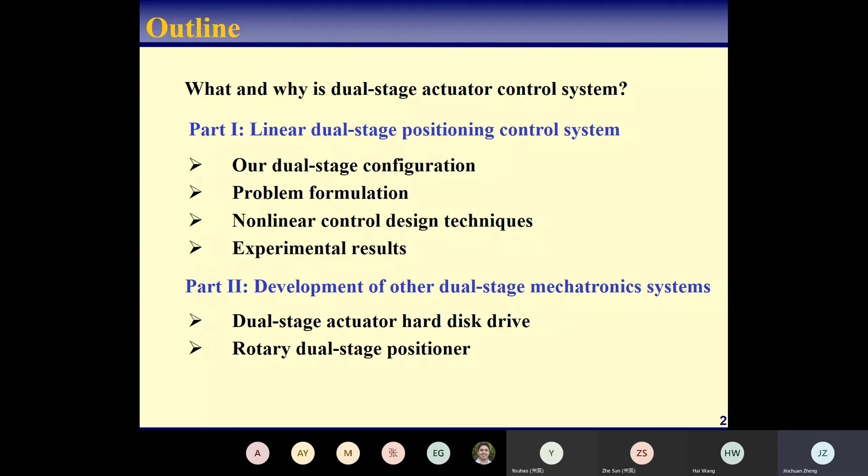In part two, I will continue to discuss some other dual-stage mechatronic systems we have built or tested on practical mechatronics dual-stage systems. This includes hard disk drive systems and also a rotary dual-stage positioner that we built from scratch.

So the first topic is why and what is dual-stage actuator control systems. To begin with, I may start with the most common single-stage actuators. Actually, in the literature, you may not usually see the term single-stage actuator. You just see some linear motor or single-stage DC motor or those rack and pinion stages. This is the most common name that you will see, but actually this is classified as single-stage actuators in this talk.

So what I define here is the single-stage actuator positioning device: its axial displacement is controlled by one single actuator only. So here, what I mean is that axial displacement is only one axis, rather than two axes. In the literature, you will see multiple axis positioning systems controlled by multiple actuators as well, but here I'm talking about one axis controlled by one single actuator only.

So the reason for introducing single-stage actuator is to easily compare with what we propose here, dual-stage actuators. This one I believe you will be very familiar with: linear motor systems. This is the moving platform controlled by a coil which is controlled by control current. Once we input the current to the coil, through the magnetic force, you will move around this axis.

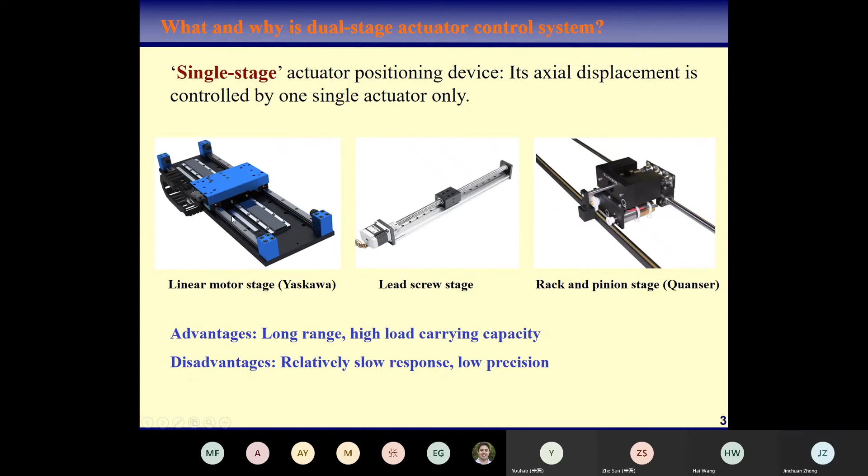Also in recent years, there are a lot of MEMS micro actuators. They can provide very high accurate positioning performance. Compared to the other actuators, this kind has high precision and fast response speed, or equivalently a high bandwidth in terms of control. However, the disadvantage is that it usually has a very short, limited travel range.

For example, this kind of voice coil actuator can usually only travel by a few centimeters. For the piezo actuator, it's usually in the order of a few hundred micrometers, and MEMS is much less, usually a few tens to 100 micrometers range, with a very low capacity as well, only a few hundred grams.

For the VCM, usually it's a bit larger, up to a kilogram. So these two kinds of actuators each have their own application area, and they are very popularly used in industry and also in some research instruments.

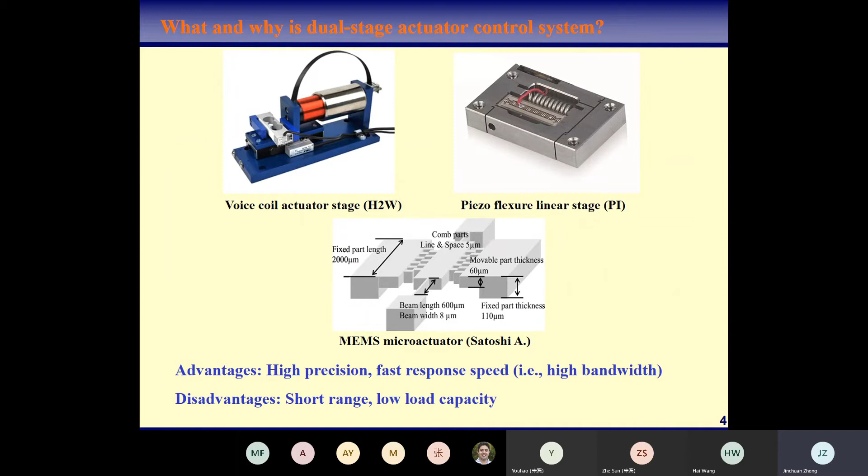Let's look at two application scenarios. In semiconductor wafer inspection, either a camera or microscope is used to scan across the surface of this wafer to detect its quality. The performance requested here is that we need to control this camera, this lens, to be fast and accurate.

This actually requests the positioning system to have a higher resolution, meaning we need to control this positioning device to be much more accurate, so that we can increase the resolution of the surface scanning.

The other application of this positioning device is in 3D laser nano printing. This figure comes from the Swinburne CTAM Center, for nano fabrication. You can see this is the material to be fabricated, and this is the laser. There's a scanning stage used to move the sample or material in the X and Y direction.

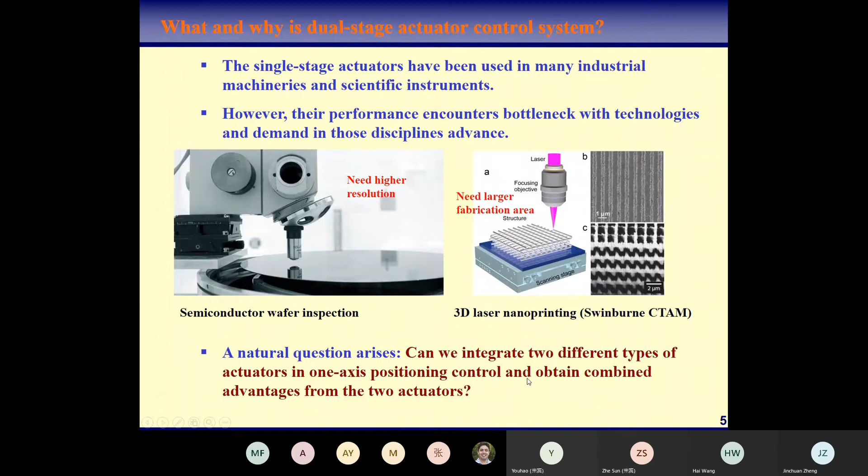So the answer is, of course, yes. The solution is to use so-called dual-stage actuator systems, where we combine the actuators in series. The primary actuator, usually called the coarse actuator, provides long range, although it has poor accuracy and slow response. We accept this disadvantage because it's compensated by the second actuator. To compensate, we need fine actuators that provide high precision and fast response. Although it has a micro range, that limitation is compensated by the primary actuator. So these two actuators are complementary to each other, giving us combined advantages of long range, high precision, and high bandwidth actuation.

This concept is used in accurate high precision positioning systems in recent years, but a similar concept was proposed many years ago, for example in robotic manipulators. In robotic manipulators, they use another terminology called the macro and micro system. Mechanically they have a similar concept, but from the control perspective, they actually have a different meaning, which I'll introduce later.

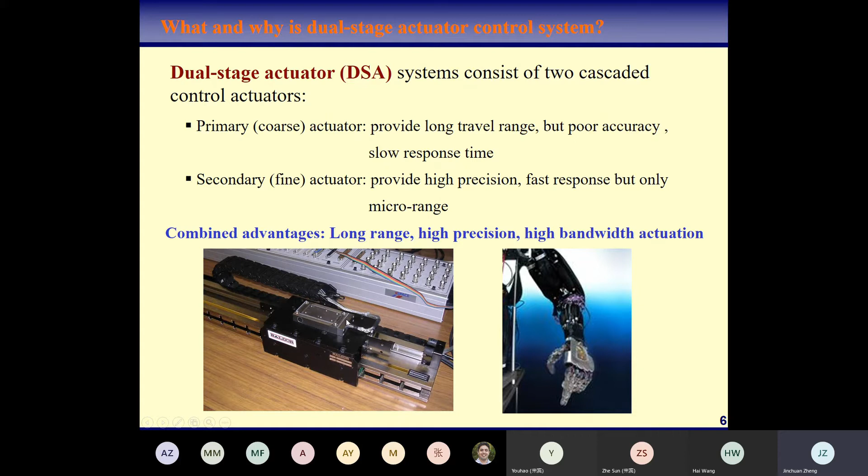This is another example, what we developed initially to investigate the control method for dual stage. In this dual stage setup, it has a linear motor as the primary actuator, and then we place a piezo positioning stage on top of it. They are placed in the same axis so they can provide positioning in that axis simultaneously.

So why dual stage actuator control systems? Here are some further comments. The motivation for studying this is that improvement of the drive mechanism of a single stage system usually comes at the cost of manufacturing period or economical cost to fabricate the mechanics. One major question people ask is: why don't you just improve the performance of a single stage actuator, make it more accurate or give it a larger travel range? Of course this is feasible, but from a cost perspective it usually takes more time and development period, and sometimes there are technical challenges as well.

For example, for piezo actuators, if you want a larger travel range, you have to stack multiple layers of piezo actuators in one single device, and this usually costs much more. Once it becomes longer in length, it also becomes more brittle and prone to breaking. So this is some technical challenge as well.

That's why we think the dual stage actuator is a more cost-effective solution, because it only poses some control challenges. Mechanically, we simply stack two actuators in one axis, which is very easy to implement. The only challenge is the control, which I'll introduce later. That's why we need dedicated control algorithms for dual stage actuators. However, this is only at the cost of hardware realization, and the controller is implemented in an embedded microcontroller, so it's relatively cheap to implement.

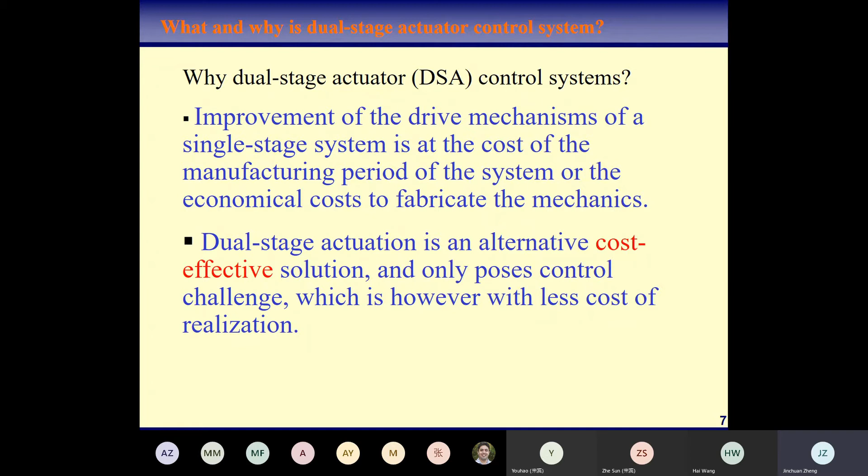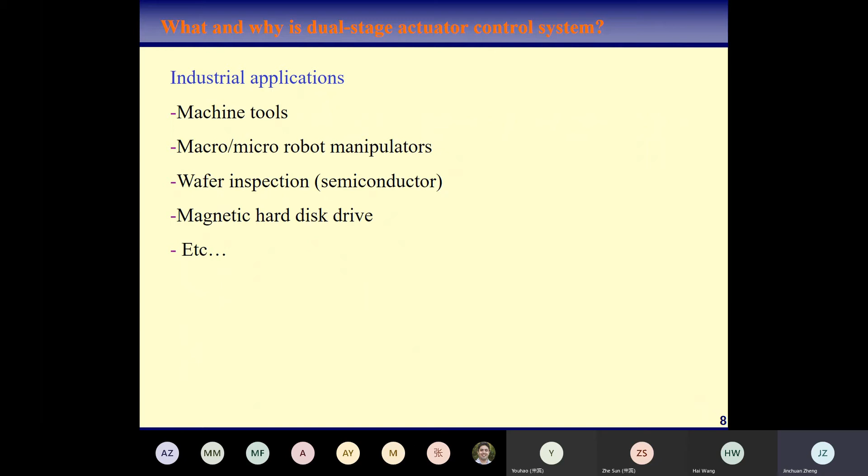The dual stage actuator system actually has a large range of industry applications. This includes machine tools. The macro micro robot manipulator can also integrate these dual stage actuators on top of it to improve the precision. The other ones are semiconductor and also magnetic hard disk drive, which is one of the application areas that uses dual stage actuator systems. This will be introduced in part 2.

Let's look at two examples here. The first one is called atomic force microscopy. This is an expensive instrumentation used to scan a sample profile in 3D dimension. You can see in this bottom picture, this is one sample - suppose this is something like a cell. We want to scan the 3D profile of the cell. And this is one of the commercial atomic force microscopy devices.

Their working principle is not too difficult to understand. They use a cantilever - this is some probe - to touch the sample, and then you scan it in the 2D dimension by moving this probe through the piezo scanner. Then you can do the scanning of the samples, and we have the laser sensor here to detect the height of this cantilever, sometimes we call it probe as well, so you can know the height of the samples. Because we can control the piezo in XY direction, we can record its XY coordination, so we can have the XYZ value for each point that the cantilever goes through. Using this data, we do some data processing, and then we can have this image of the sample profile.

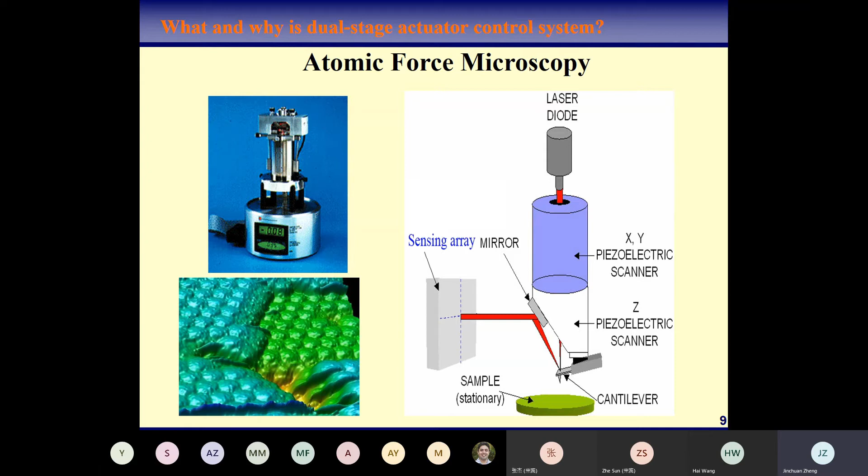You can imagine there are a lot of tracks condensed on this disk, usually 2.5 inch, and desktop hard disk drives usually 3.5 inch. This is a very typical form factor of the hard disk drive, and this form factor hasn't changed over the last 10 years. But now the requirement is that we need to put more data tracks on this surface, so the tracks are getting narrower and narrower. This requires the positioning device to be more accurate, so it doesn't deviate from the track center when reading the data from the surface.

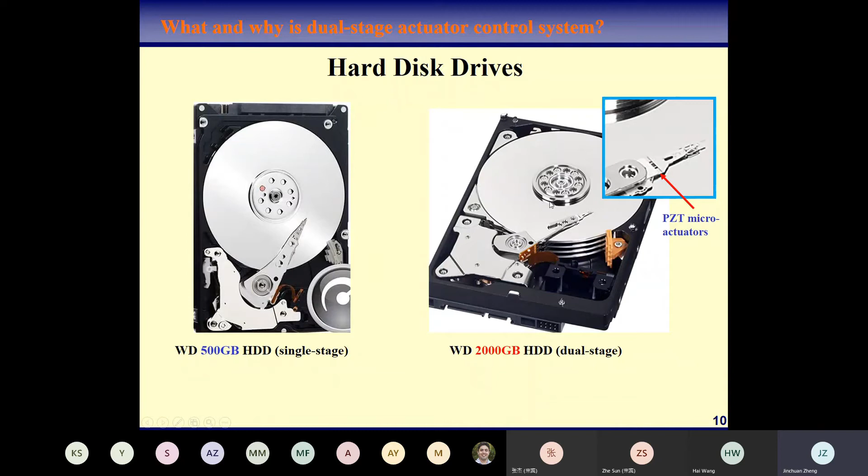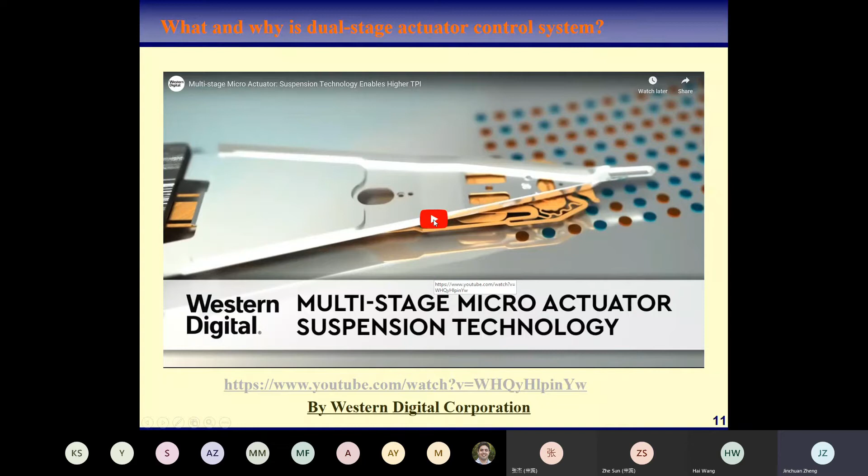So to explain this, Western Digital filmed a very short video to explain what is dual stage hard disk drive. I feel that this is quite interesting and quite clear to explain this concept. So let me just play this short video here.

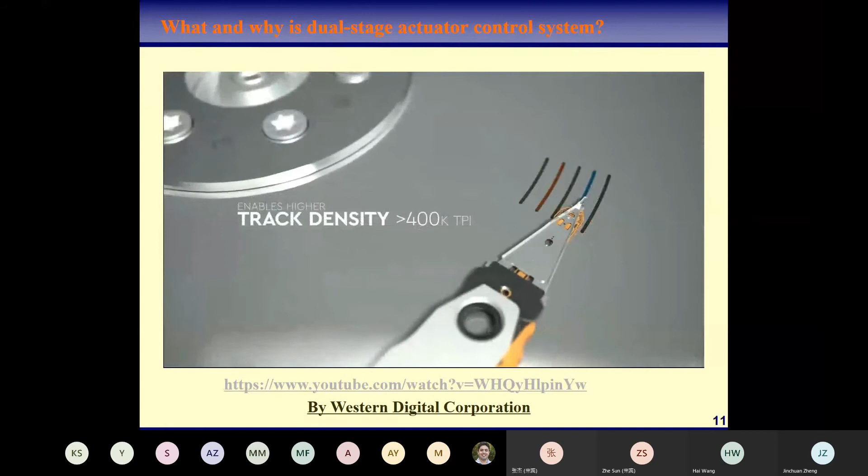Okay, so let's keep going.

So for the dual stage actuator system, this is my perspective. I just classify it into 2 types. If you classify the dual stage actuator system according to the motion type, it has linear motion and also rotary motion. So in this talk, I will cover both of them.

According to the fine actuators employed, usually it uses a micro actuator to provide some micrometers range as the fine actuator. There are also some MEMS actuators that have been employed and demonstrated. Usually they provide less travel range, just 1 micrometer or less, but they can provide higher precision.

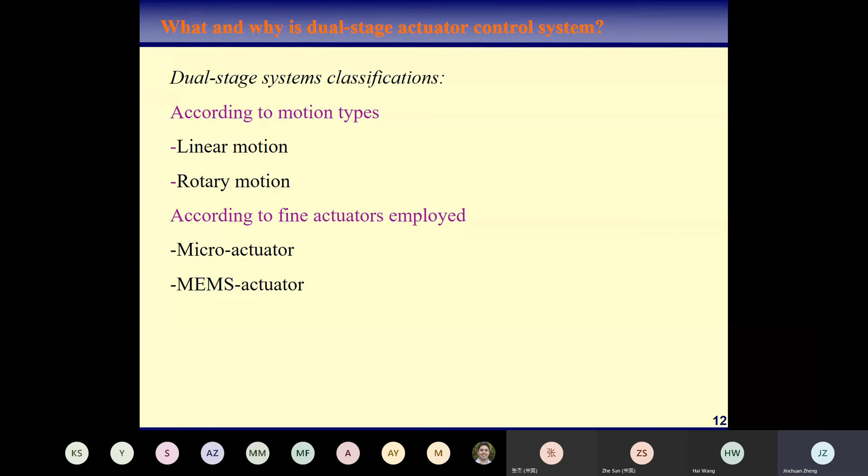So let me go to part 1. This is the linear dual stage positioning control system. This part mainly comes from one of the papers that we published a few years ago, which is listed here.

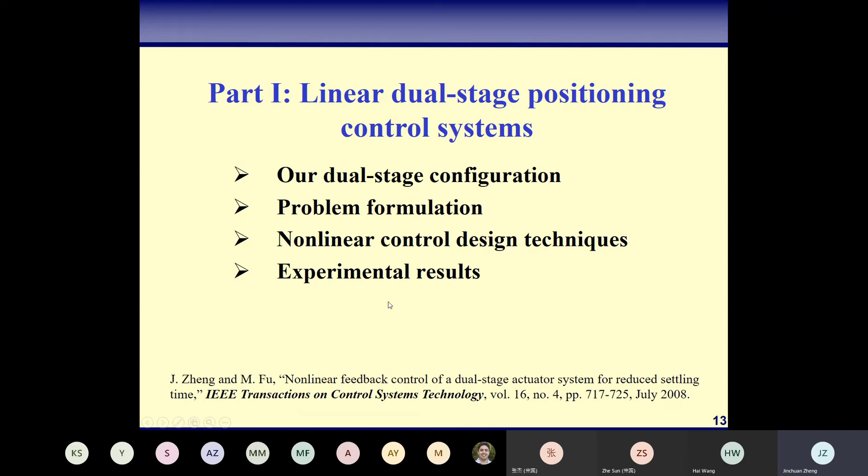So this is our developed linear dual stage configuration. Actually this is nothing but just 2 commercial motors and actuators that we simply stacked along 1 axis. This is a linear motor, and this is the piezo micro actuator.

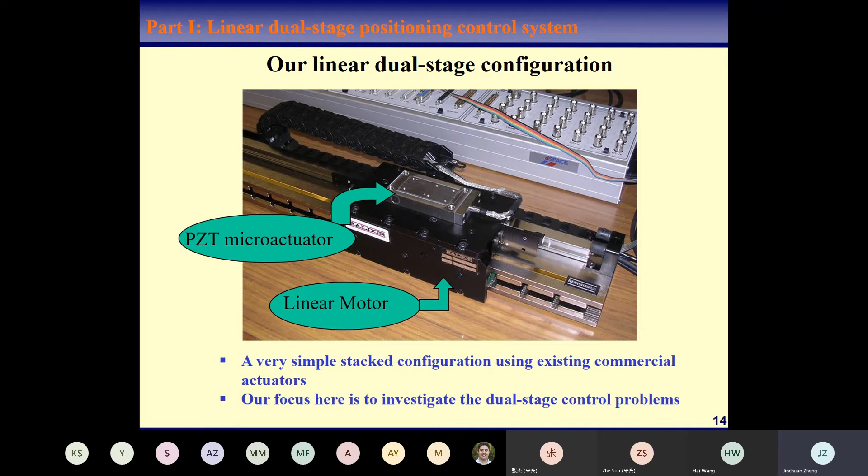We didn't have any contribution on the design of this mechanism, because at that time our main focus was to investigate the dual stage control problems. These 2 actuators are properly selected so that they can reflect some of the control problems we will introduce soon. For the linear motor, it has a 500 millimeter travel range, and a 1 micrometer resolution encoder.

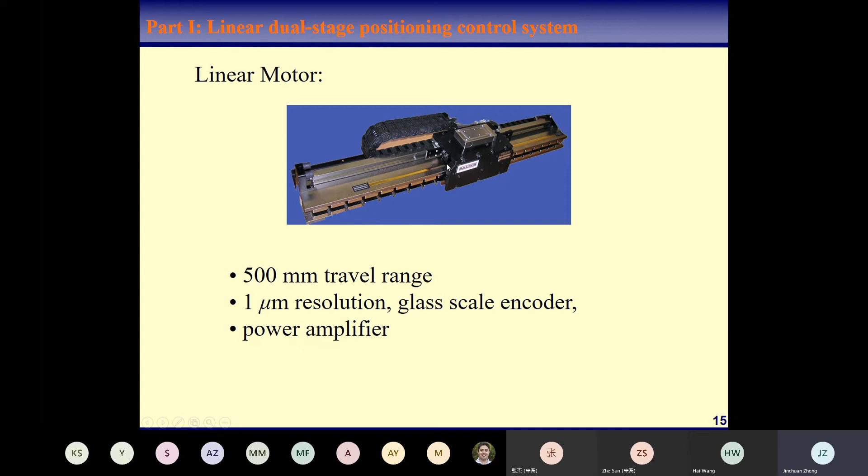Integrated inside the linear motor, you can see this is the scale used for the position encoder to detect positions. It also comes with a power amplifier, basically a voltage to current amplifier. So we use the controller to generate the control command, it goes through the power amplifier, converts to current, and generates the force to drive these motors.

The second actuator is the piezoelectric micro actuator made by PI. For this stage, you can't see the piezo actuator because it's integrated inside the stage. There's also a capacitive position sensor integrated inside to detect its position. This position sensor is very accurate, with a 0.2 nanometer resolution. The travel range of this stage is 30 micrometers total.

In our control, because we need bidirectional control, we offset it to the middle of its range so that we can provide bidirectional positioning control. Similarly, it comes with a piezoelectric amplifier, which is basically a voltage amplifier with an amplification ratio of 10. So the final maximum control voltage going to the piezo is 100 volts.

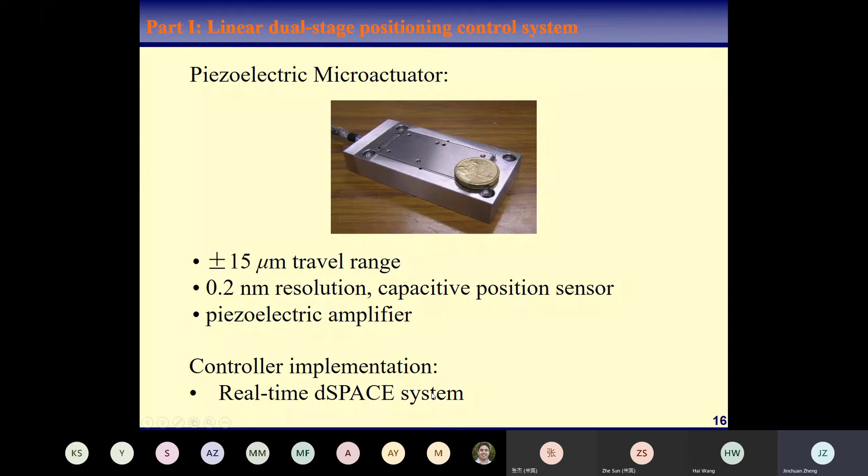For control implementation, once we design a controller, we implement it using the real-time dSPACE system, a high performance real-time and fast prototyping system.

Our control objective here is to make the total position output Y accurately track a reference input. This is called the seeking control problem. To make this seeking problem fast, we need a high bandwidth control loop. Another control problem of dual stage is accurate tracking response, or good disturbance attenuation.

This means that if you have some disturbance coming from the linear motor or piezo actuators, by detecting this Y, we need some control feedback so that we can regulate the linear motor and piezo actuators together to reduce this disturbance effect. So this is another main control problem.

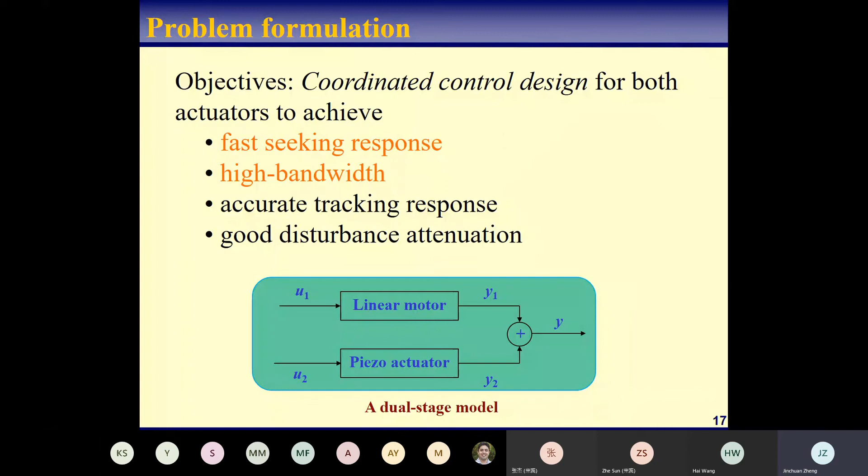Regarding the seeking control, a very typical design method is that the controllers for the two actuators are designed separately. First, we let the primary actuator's control loop track the reference command, but with very little overshoot. Then the secondary actuator control loop will follow the positioning error of the primary loop.

If you imagine that the primary actuator can eventually track the reference input, and the control loop just follows the positioning error of the primary loop, eventually it can also achieve the desired YR. Because the position error is compensated by the secondary actuator, it can respond fast at the initial time.

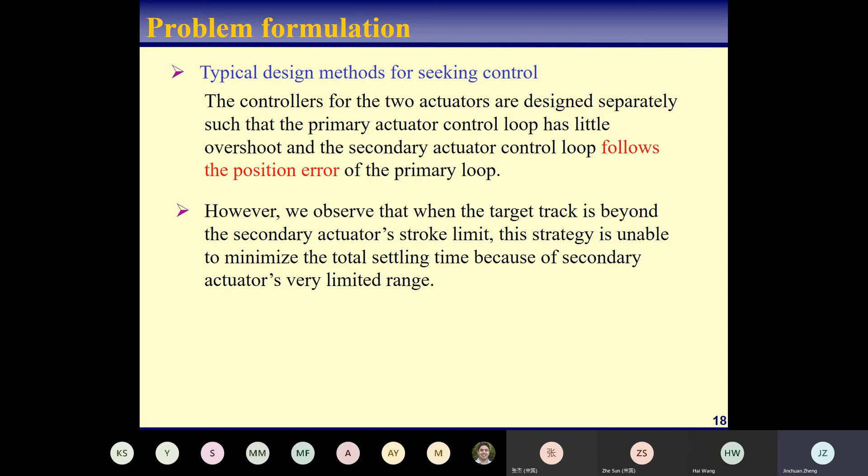However, we observe that when the target track is beyond the secondary actuator's limit, these strategies are unable to minimize the total settling time. This is mainly because of the secondary actuator's limited range.

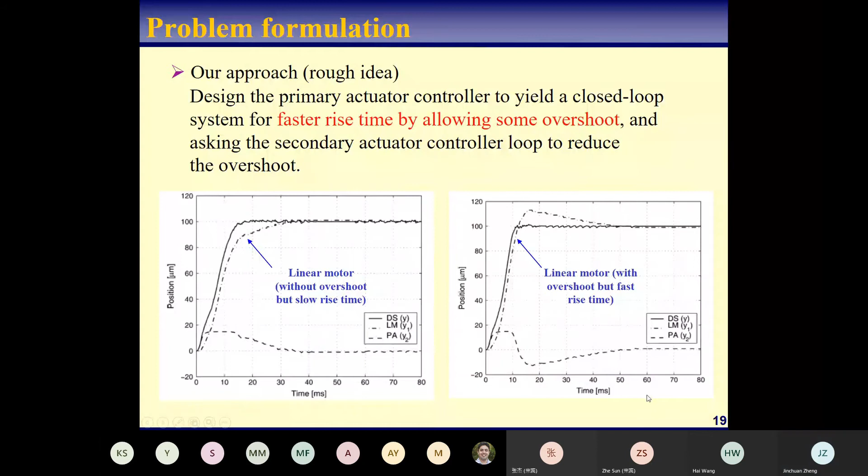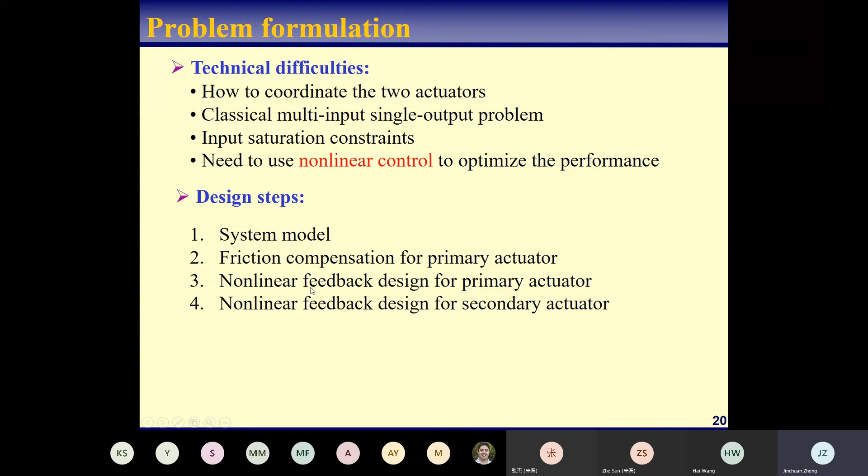So this is what I mentioned in the previous slides, that we have to use nonlinear control to optimize the performance. Regarding the design steps, we first identify the dual stage system model using state space, and then we need to identify the parameters of the dual stage actuator models. Because the linear motor has significant friction nonlinearities, we have to use a specific compensator to compensate for this friction first, so that we can shift the primary actuator to be a linear model. This eases the control design of the dual stage control as well. Then we propose nonlinear feedback control design for both the primary and secondary actuators.

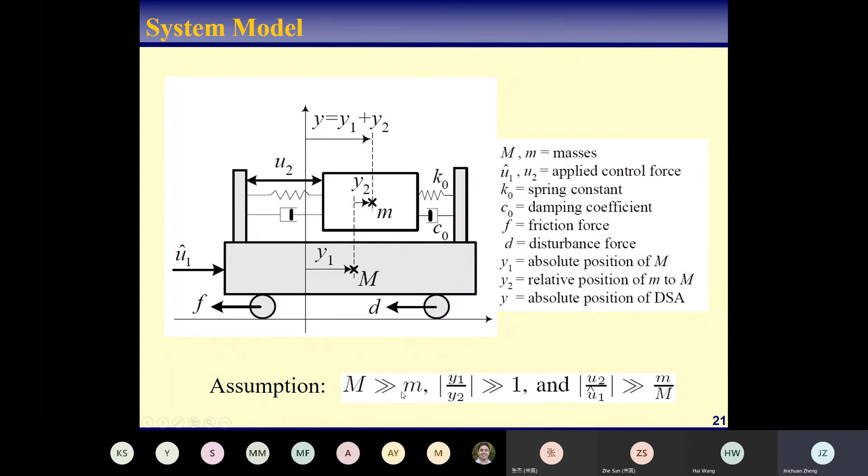So this goes back to the mechanism design that I mentioned earlier. You cannot just simply choose any motors or actuators you want and then combine them. If you don't properly choose them, it will cause some control problems. I'm not saying it can't be solved, but it will give you more difficulty in the control design.

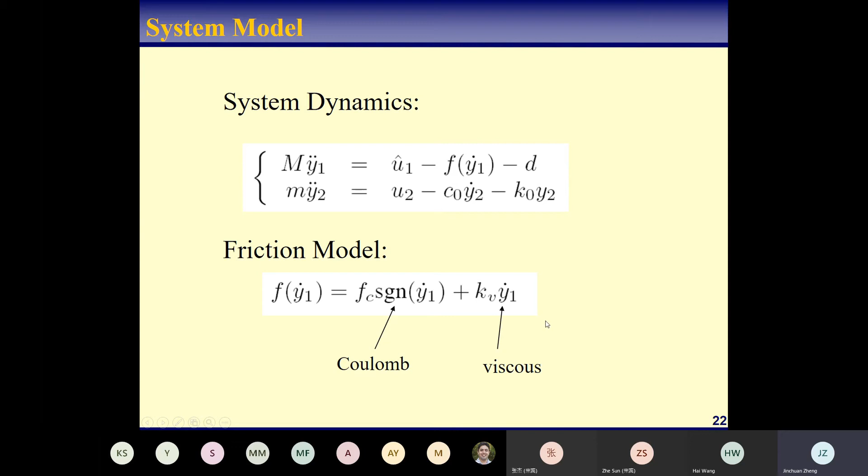So this is the model dynamics. We use a second order model for the linear motor and also the piezo actuators, and in this case we use a linear model. We put the friction as a separate term here, and the friction model has two parts: one is Coulomb friction, this is static friction, and this is viscous friction.

So the first part, we do a friction compensator to remove the friction effect. This is done through this block diagram here, which is very similar to the disturbance observer. The main feature is that we use the inverse of the plant model, where GN is the nominal plant model, which in our case can be just a simple double integrator.

And the Q is a low pass filter. We can design it this way, a third order low pass filter. The order chosen is to compensate for the improperness of the GN here, because we do the inverse.

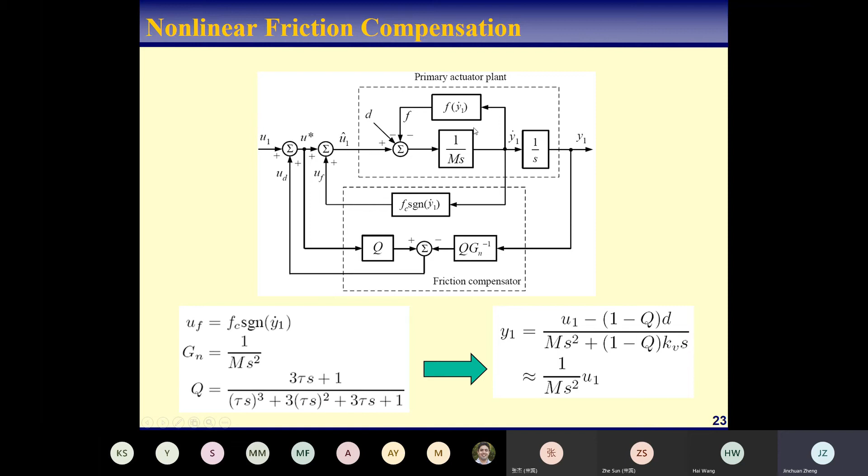So through some calculations, you can find that from U1 to Y1, you get this transfer function, which is approximately a double integrator now. This means that the friction nonlinearity is cancelled by this compensator.

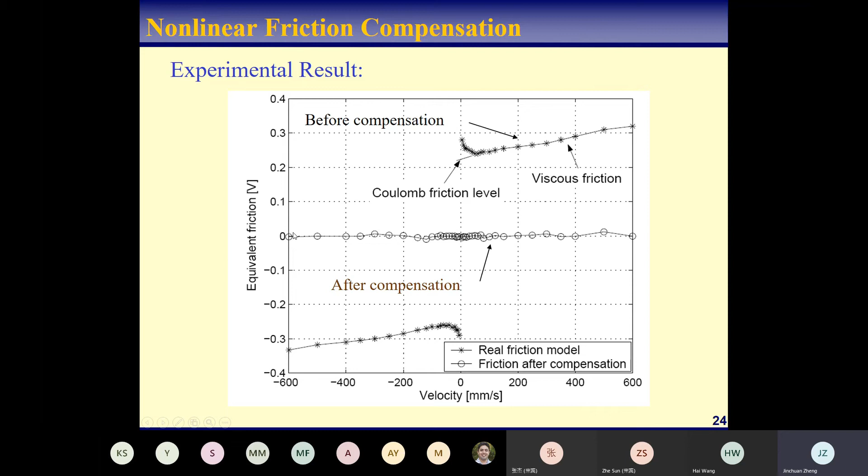We also explicitly consider the saturation in the control design. The main design objective is that we first design a primary actuator controller because it's decoupled from the secondary actuator. So we can design the controllers separately, and because our control objective here is the seeking control, this means we need a time optimal controller to achieve the desired performance.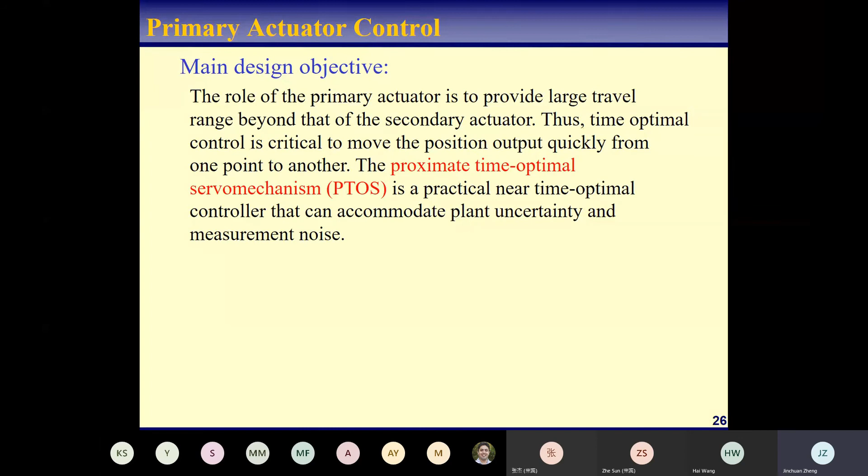So here we employ the so-called proximate time optimal servomechanism, PTOS. This is a near time optimal controller, meaning it's quite close to the time optimal bang-bang controller. The basic idea of PTOS is that we use maximum acceleration at the beginning of the seeking stage, and halfway through we start to decelerate by applying the maximum negative control input. Then, when it's close to the target, we switch to a linear controller, usually a linear PD controller, so that we can have a smooth transition to the target without control chattering.

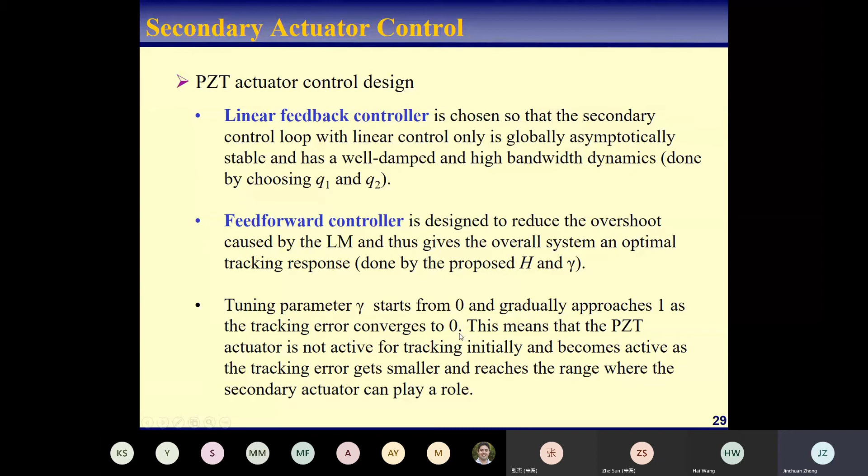With this proposed controller, we need to theoretically prove the overall system stability. So we have this lemma: consider the dual stage actuator system formulated in the previous formula under the PTOS control law, and also the secondary actuators under the proposed nonlinear control law. Here we can allow any non-negative function gamma.

You can choose any non-negative function gamma, there's no unique form required, only that it's a non-negative function and continuous in Y. Then we can prove that the overall control system will drive the total system output Y to track the step command of amplitude YR.

I will not give the proof in detail here, please refer to the paper. But basically, our proof is based on the Lyapunov stability theory and the converging-input bounded-state property in the dual stage closed loop.

And from this lemma, it's interesting to see that the value of gamma does not affect the stability of the overall dual stage system. So this allows us to properly choose this gamma function to improve the transient response. This is the key property of our proposed control design.

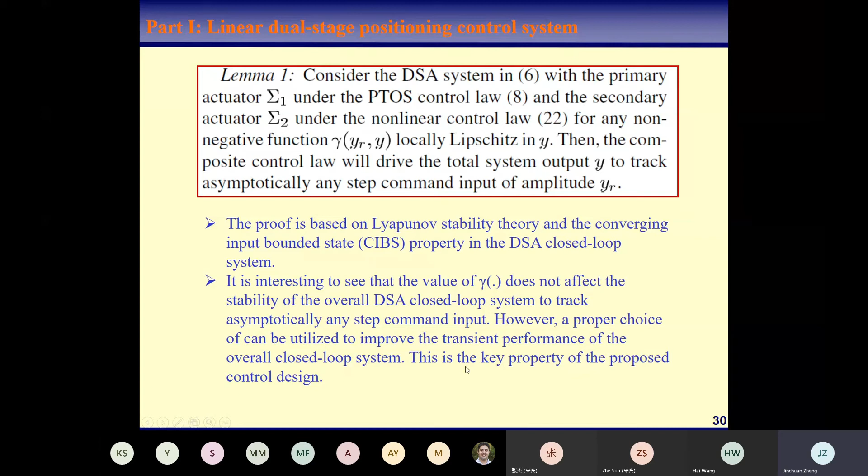So to proceed, I would like to present some experimental results that we have done. This is the modeling of the linear motor. We do the frequency response modeling, and we can see that it matches quite well between the identified model and the measured one.

But you can see that the linear motor has a low bandwidth, around 100 Hz only, because beyond this 100 Hz, we can see quite a lot of uncertainty and noise here. This represents some nonlinearity in this region. So we can expect that this one has clean linear properties below that.

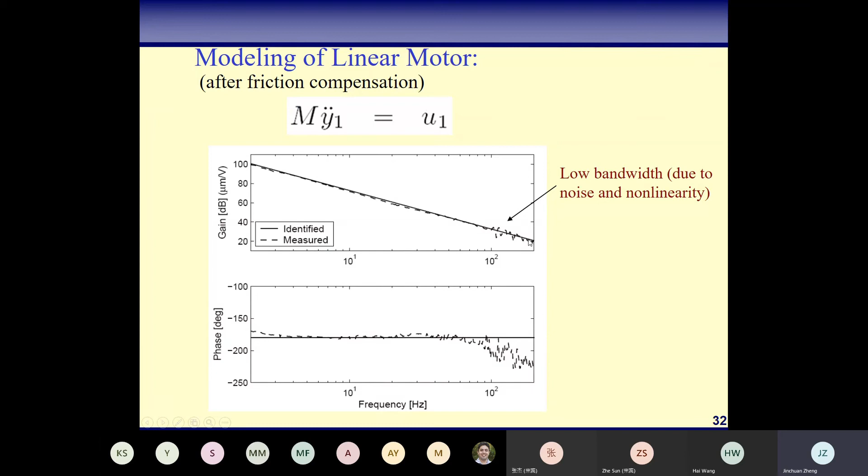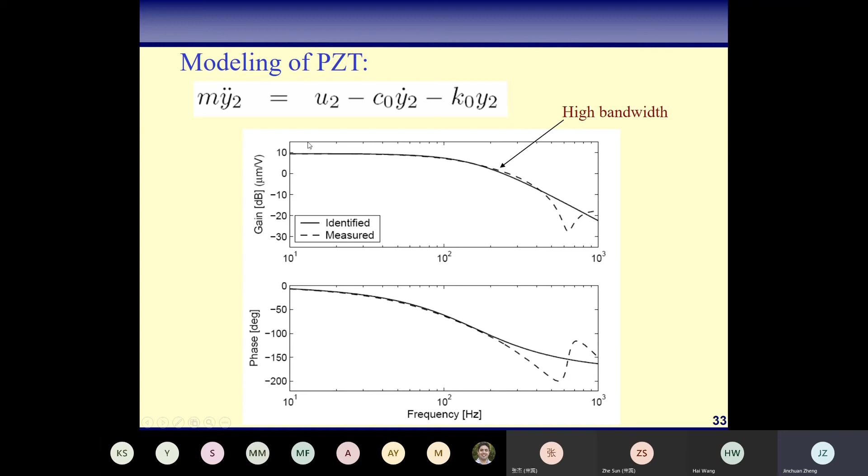This is the model of the piezo actuators. It's relatively clean, there's no noise and uncertainties here. It has a bandwidth, a cutoff frequency around 250 Hz, and we can see that they match each other quite well, especially below 200 Hz.

Going to 500 micrometers, we see a similar 5 millisecond reduction. But if this goes to a much larger range, because of the ratio of the reduction time compared to the overall travel time, the improvement may become less obvious.

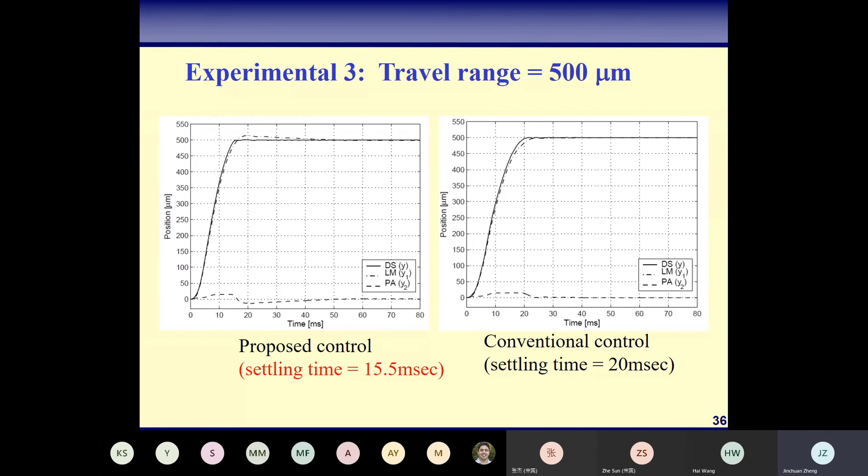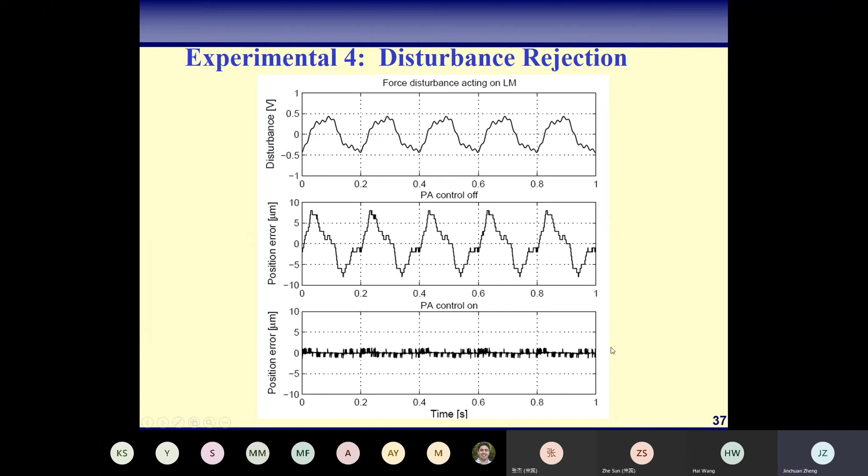Lastly, we do the disturbance rejection test. We put a force disturbance on the linear motor — this is a multiple frequency disturbance. First we switch off the piezo actuator, representing a single-stage linear motor system, whose positioning accuracy is within about 8 micrometers. Once the piezo actuator is switched on, we can see it's reduced to the best accuracy, 1 micrometer. This gives a clear demonstration of how the dual-stage actuator improves tracking accuracy. Sorry, how much time do I have?

The workshop will be from 5 p.m. to 6:30. For part two, you only need to give a brief introduction, and for your research idea I think it should be fine. Okay, I will use 10 minutes to finish. No worries, thank you, we discussed.

No problem. So the second part is the dual-stage hard disk drive. For this part, we don't propose a new control method, we basically use the proposed nonlinear control method but verify it on these new systems. For the rotary dual-stage positioner, we involved mechanism design from scratch, manufactured the positioner, and then applied the proposed nonlinear controller on it as well.

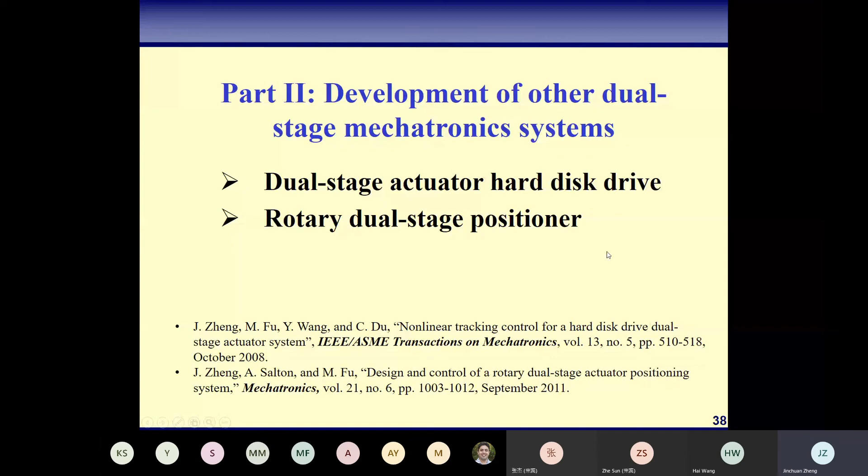We have two piezo strips between the suspension and the VCM actuators. This piezo strip has a very small stroke limit, only 0.5 micrometers. But usually this 0.5 micrometers is much larger than the track width — it's a few hundred track widths — so it's enough to regulate the tracking accuracy.

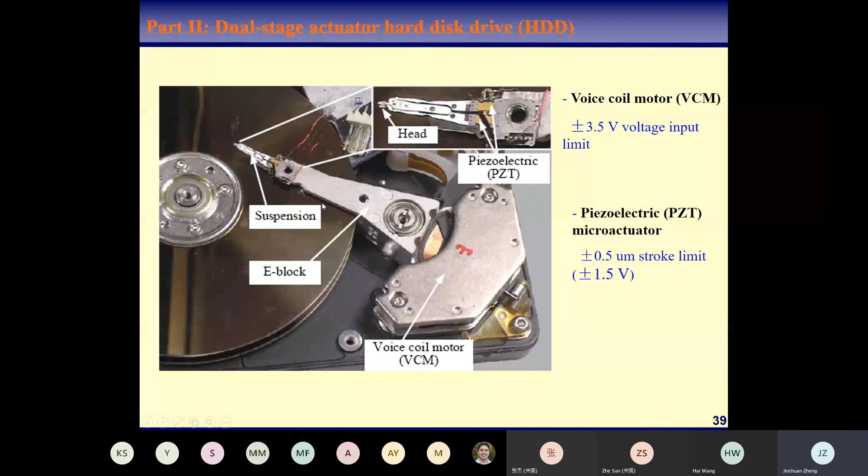A main difference of the dual-stage hard disk drive model compared to the linear motor one presented earlier is that it's more challenging to control, because there are a lot of high frequency resonant modes. This comes from the lightweight, thin mechanism of the VCM and the suspension. When implemented, all these resonance modes cause vibrations, which significantly reduce the tracking accuracy.

So we have to deal with these resonance modes using some filtering techniques. In our case, we use a notch filter to damp this resonance mode. This is implemented in the VCM and also in the piezo actuator.

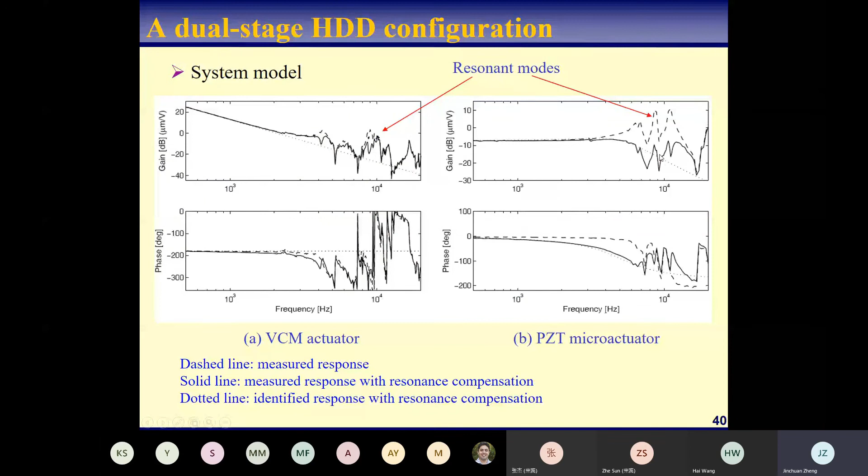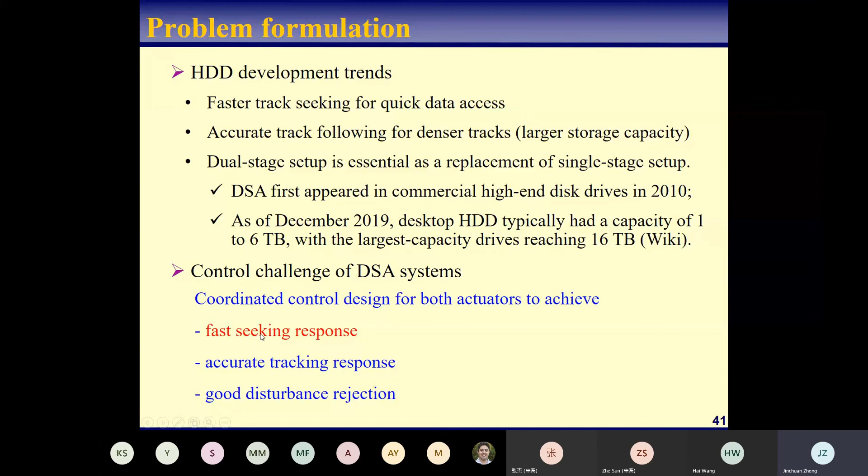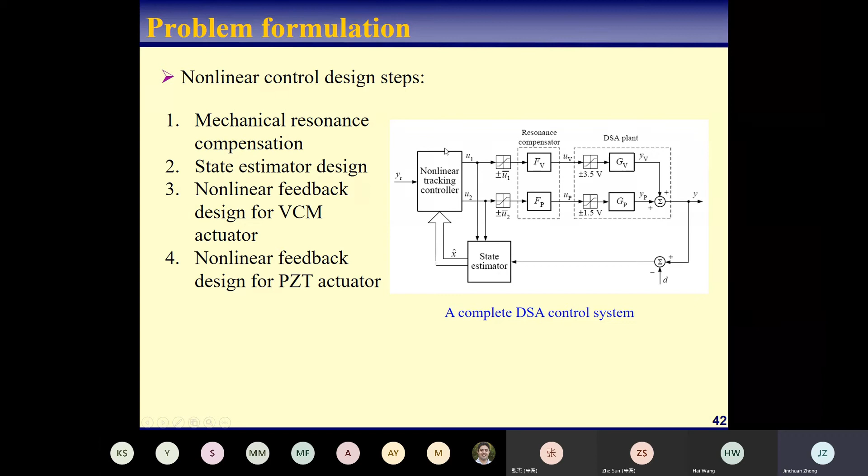Similarly, we will demonstrate the nonlinear control for the seeking response. This is our block diagram of the control. We have two main parts different from the previous one: a filter designed for the dual-stage plant, and a state estimator using the measured output and control input to estimate the state. Then we use the nonlinear controller to do the same thing for tracking control.

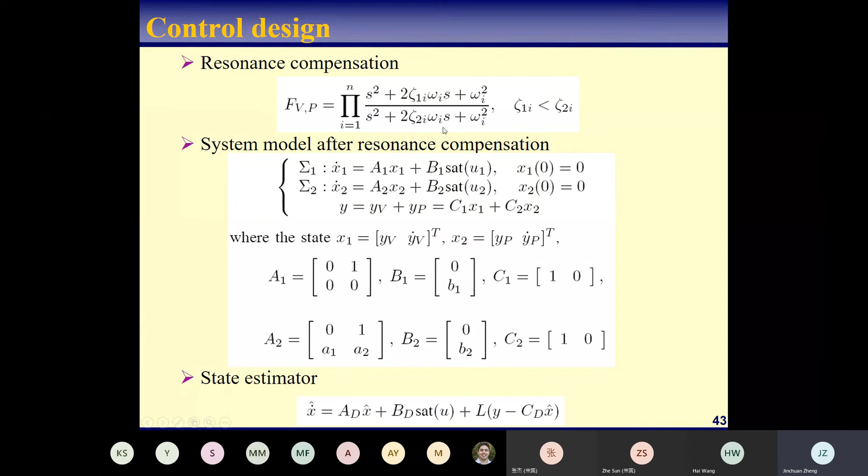This is the filter equation — it's second order, but multiple filters are used to damp each resonance mode. The controller is similar to the previous one. Now let's go to the experimental results.

In this case, there's not much sense to use the proposed control method. But in the mid or large travel seeking range, it makes sense to use the proposed method.

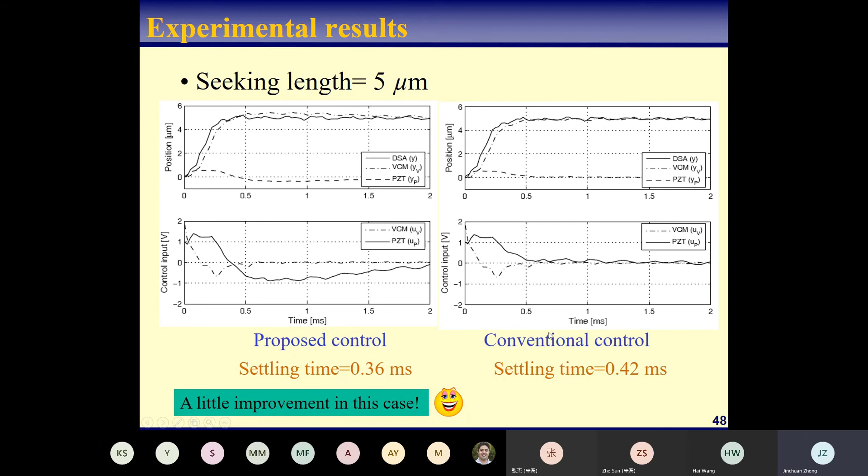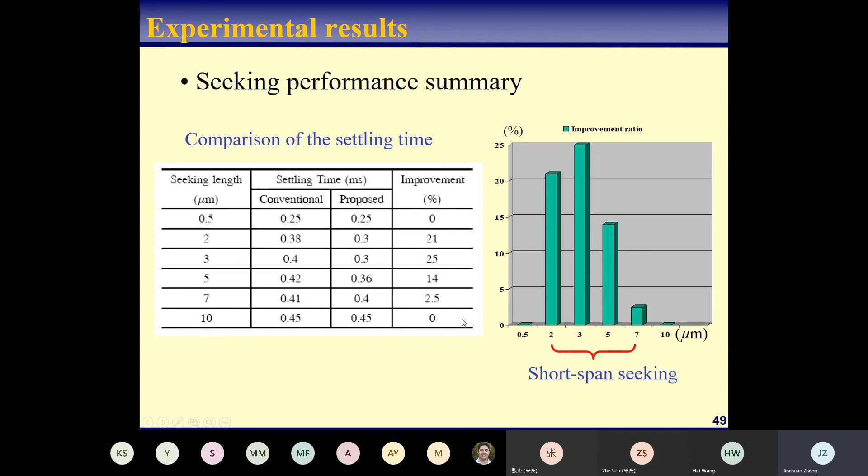So maximally, if this is a 3 seeking length, we can have a 25% improvement. For this range, it's important to have a hard disk drive, because when you do data searching in the hard disk drive servo, you very often control the magnetic read and write head around this range from 2 micrometers to 7 micrometers. Similarly, we do so-called track following, which is trying to maintain the positioning head over a data track as accurate as possible.

We can see this spectrum of the positioning error, and we can see that it will reduce low frequency in the positioning error. The PES 3 sigma is reduced by 14%.

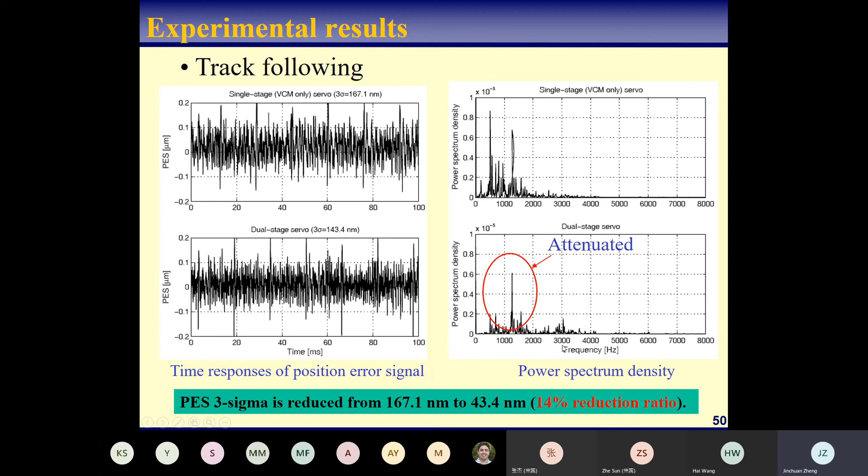Lastly, this is what we designed for the so-called rotary dual stage positioner. This is motivated by the hard disk drive form, but the hard disk drive is too thin and too small for some applications, especially for its very low load capacity. We are motivated by some applications, for example, surface inspection and microscopy. So this has led us to this design.

So we use the primary stage, this is a VCM actuator, and we have the piezo actuators. We design this flexure beam, and then we have these 2 actuators to control the platform. We can imagine the sample can be placed here, and then we can control the position. Of course, it's an arc position in this case, so this is why we call it rotary.

Eventually we can achieve the performance here. We can have a 73 millimeter travel range in this arc, and then we can achieve a 0.15 micrometer accuracy. Of course, this accuracy is much smaller than the hard disk drive, but think about the mass and also the overall travel range, and also the load capacity is much larger than the hard disk drive. So this is also reasonable.

The design we use here in the mechanism requires finite element analysis to do the mechanism design, so we ensure it has a high resonance mode and has the desired displacement achievable by the piezo actuators. This is the actuators we have chosen, with some specs.

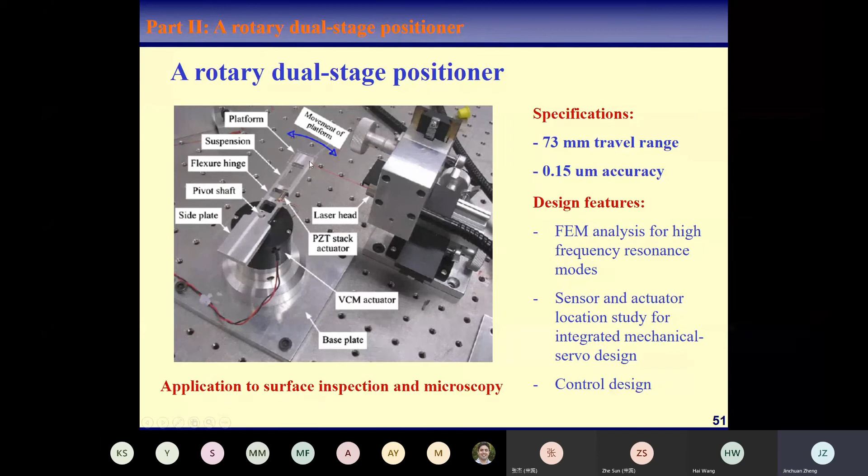This is the VCM, this is the so-called limited angle VCM. We can control the rotation angle of this one, but it's limited to 60 degrees only. And this is the piezo actuator that we use to insert into this slot. By controlling the voltage of the piezo, it can expand this pin, and through this flexure hinge, it will push this platform to move in both directions.

In designing this flexure beam, there's a lot of concern. We need to think about the shape, the dimension, and what type of material to fabricate this one. Here we use aluminum, this type of model, this type of aluminum. And we need to carefully design the hinge size.

And of course, we need to design the suspension properly as well. This suspension works as a simple lever motion amplifier. Think about it, it's only a few micrometers range here, but if you have a long suspension, then you will amplify the position at this tip here.

But there's some trade-off we need to carefully take into consideration during the design. If you want a large displacement here, you need to have a long suspension as well. However, this will reduce the resonance mode, meaning that it tends to easily vibrate when you put a control input to the piezo.

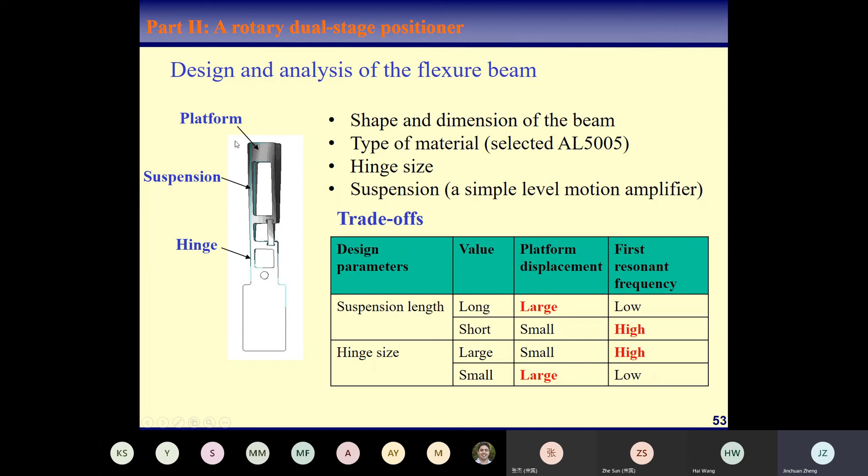Similarly, for the hinge size, if you want a large displacement of the platform, you need a small hinge size. Small hinge size means the thickness of this hinge should be small, so it's softer, easy to push, and easy to move with larger range. However, again, it will reduce the resonance mode, and vice versa. If you have a large hinge size, it comes with a higher resonance frequency, but gives you a much smaller displacement, so this is not desired. So this is some of the main concerns here.

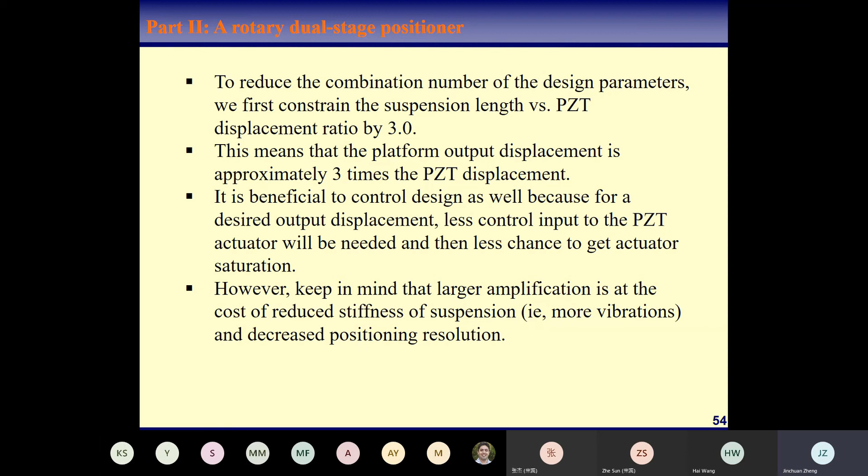To reduce the combination number of the design parameters, we first constrain the length of the suspension versus the piezo displacement by 3, and then we use finite element analysis to do some simulation.

This is an iterative design process until we find the final performance we want. We use software like SolidWorks or ProE to simulate the mechanism design, looking at hinge size with respect to displacement achieved, resonance mode, and maximum principal stress. You can't design a hinge size too thin, otherwise it's easy to break - if you go beyond the principal stress of the material, it will break. Eventually we chose a hinge size of 2 millimeters.

This gives us around 160 hertz resonance frequency, and around 35 micrometer displacement. For the stress, it's quite well below the maximum one.

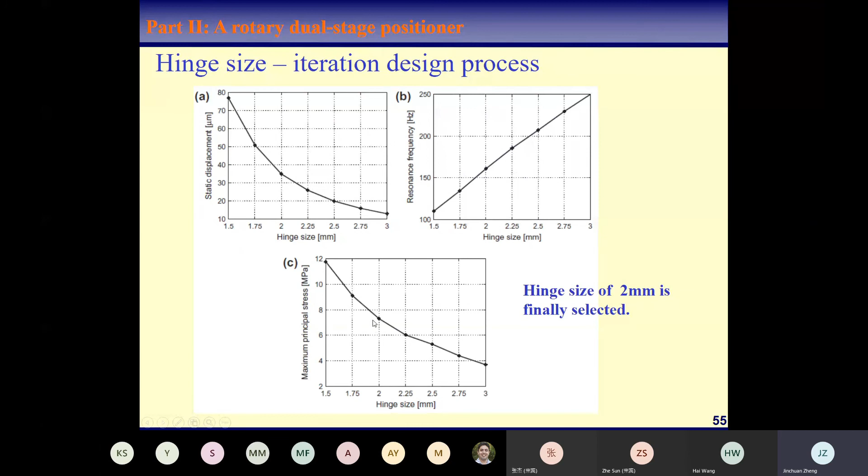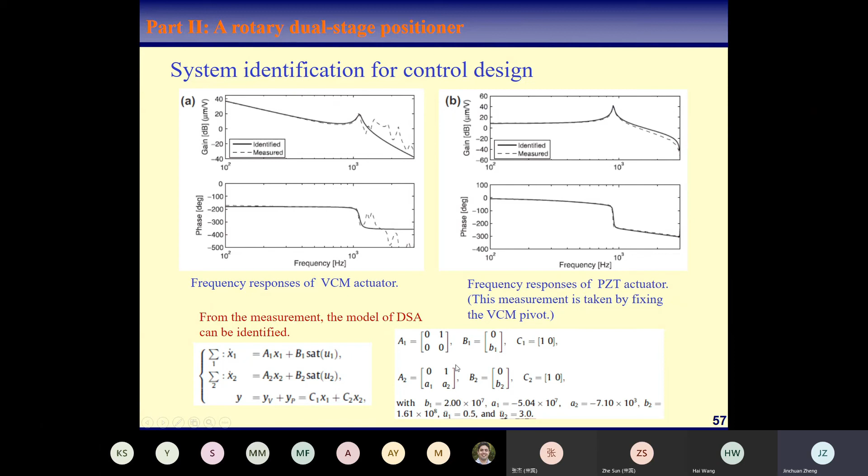This is the system identification. Again, we use the frequency response to do the modeling, and eventually we use this measured model to derive a mathematical model, with the model parameters here. Again, we use the nonlinear control method to do the experiment.

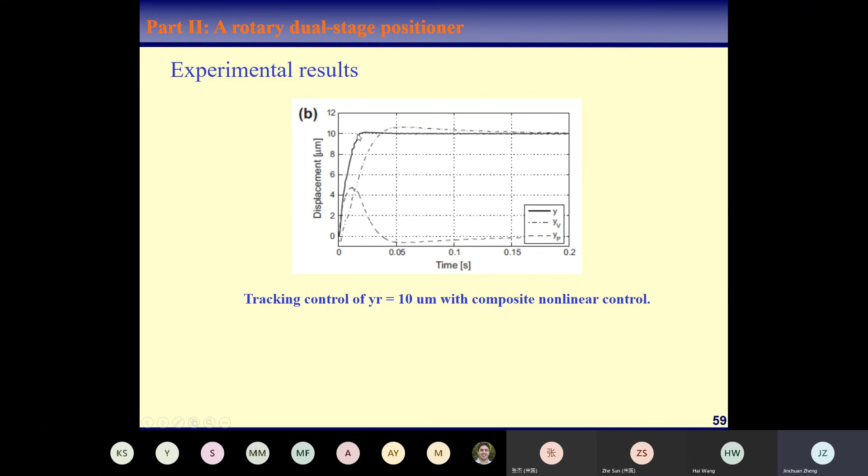Lastly is the steady state position error. We made the platform stay at its position, controlling the two actuators simultaneously, and there may be some uncertainty, disturbance, or noise entering the control loop. By observing the maximum peak-to-peak value, we can conclude that it can maintain a positioning accuracy of 0.06 micrometer.

In this case we use a laser Doppler vibrometer, or LDV, as the measurement of the position output, which is why we can reach this high positioning accuracy. But because this LDV sensor is very expensive, it's not practical to use in all dual stage systems. If we use a lower resolution sensor, we should expect that this positioning accuracy will be reduced. But in any case, the dual stage performance will be better than single stage actuators.

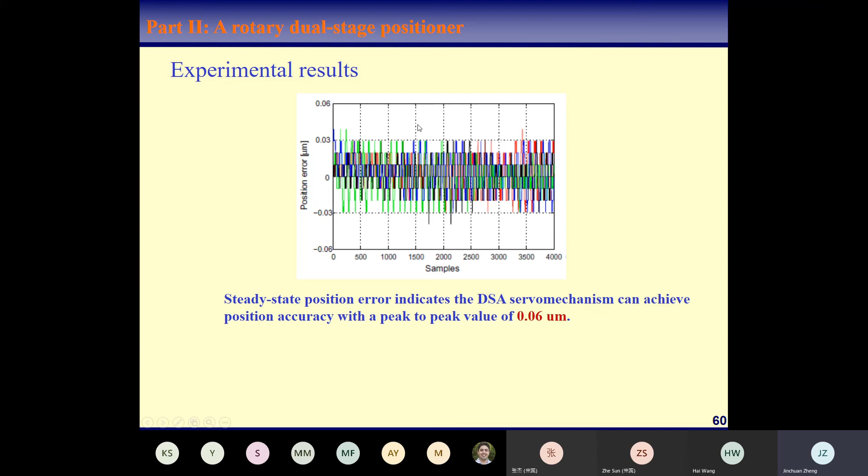That's our key point here, to propose dual stage actuators. This is the disturbance rejection - this is piezo on, and this is piezo off, and this is the sensitivity function, confirming that the dual stage actuator has higher disturbance rejection compared to the single stage across this wide frequency range.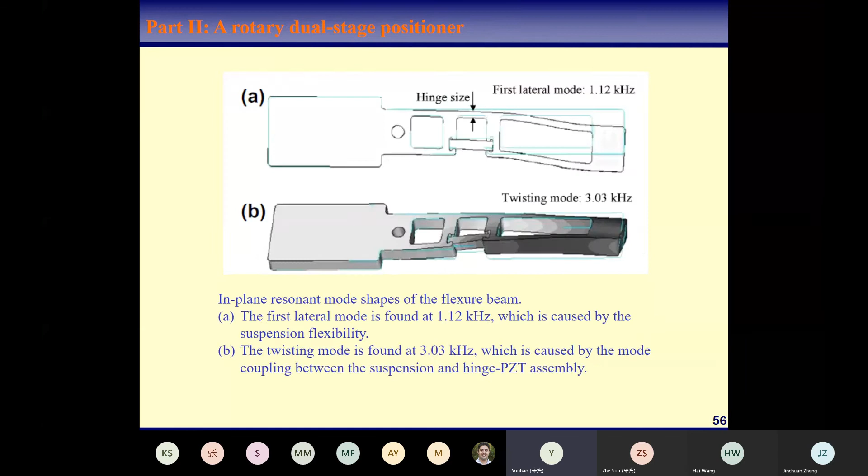Hello, firstly thank you for your wonderful speech, it's really good, but I have a question. In slide 28, I didn't know what the function F means. I don't know, how does it mean? So for the gamma function, right? Yeah, the function of h. I don't know the function of h, right? Function of h, yeah.

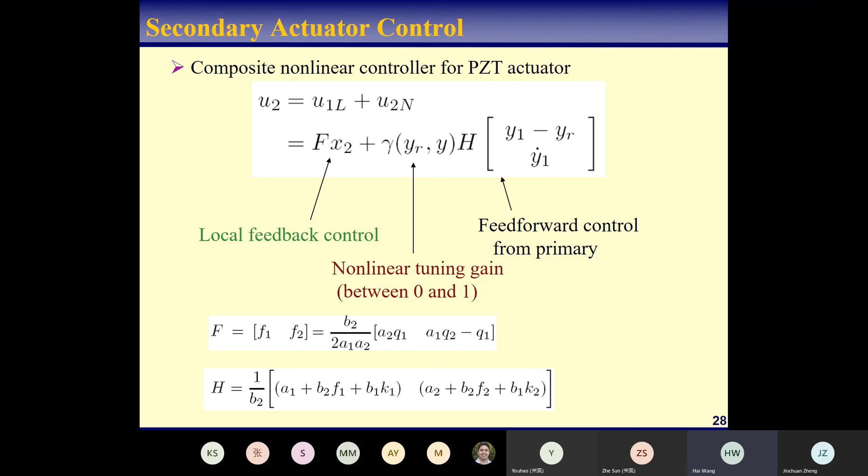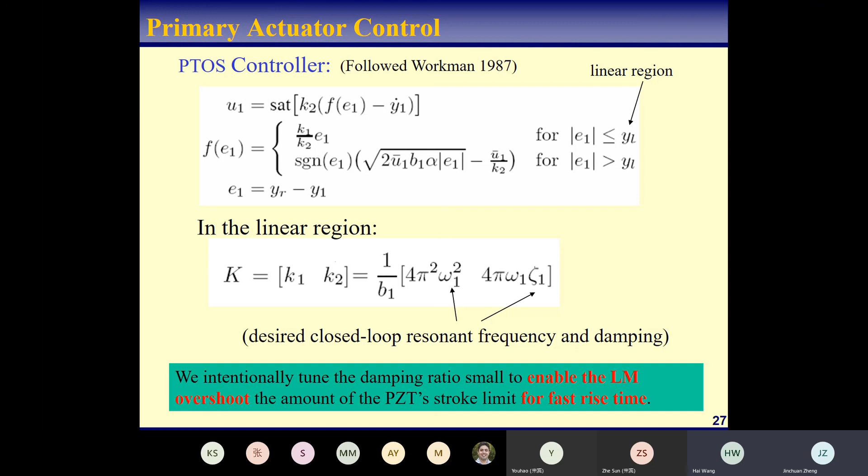Regarding control chattering, in our case here we are not using a non-smooth control algorithm, so we don't involve a lot of jumping of the control, meaning we didn't use any non-smooth control element in the controller. So we didn't see any significant chattering in the control. Regarding sliding mode control, this could definitely be investigated in our dual stage. Actually, in another paper that I didn't present here, we indeed used a fast non-singular terminal sliding mode in the dual stage, and it improved the robustness as well.